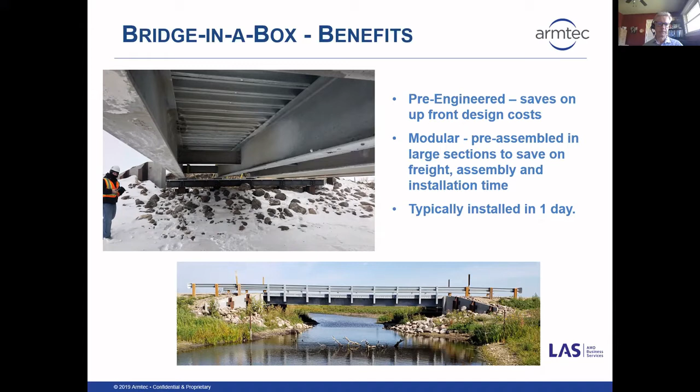The bridge-in-a-box is suitable for remote sites, resource roads, and rural roads with low traffic loads. The Canadian Highway Bridge Design Code defines these low volume roads, and Bridge-in-a-Box is designed specifically to meet this particular market. The Armtec Bridge is available with a single or double lane with widths to 8.4 meters and lengths up to 24.5 meters - that's an 80-foot long bridge. They're designed to the Canadian Highway Bridge Design Code as CL625 truckload.

That's the normal truck you see rolling down the highway. And also to what's called L100. L100 is sort of an idealistically made up truck that they use to calculate the weight, but it's similar to logging trucks or heavy permitted vehicles that may be required on the roads. So these bridges are designed to handle that kind of traffic.

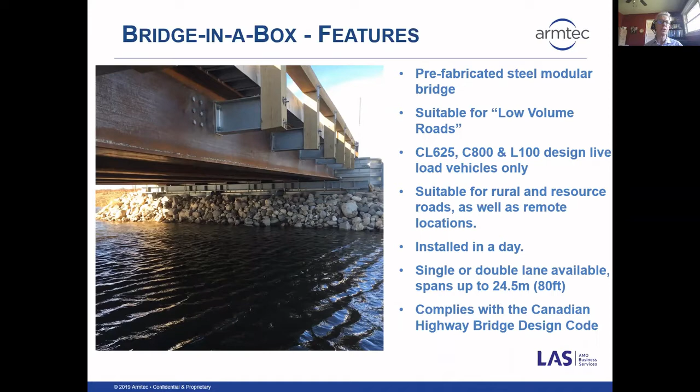Low volume roads are defined mainly by the traffic count. The bridges on low volume roads are all classified under CHBDC as Class C and Class D, which have restrictions placed on the bridge as well. The maximum traffic is defined as either 400 cars per day at 50 kilometers per hour or 100 cars driving at 80 kilometers per hour. That's the definition of a low volume road.

The bridges themselves on these roads cannot exceed 8.5 meters, and the deck can't be higher than 5 meters above the ground or the water. The idea of the low volume road bridge is this: little traffic at low speeds and a low deck have a low probability of occupant crashes, and if there is a crash, the vehicle will not fall far or into deep water.

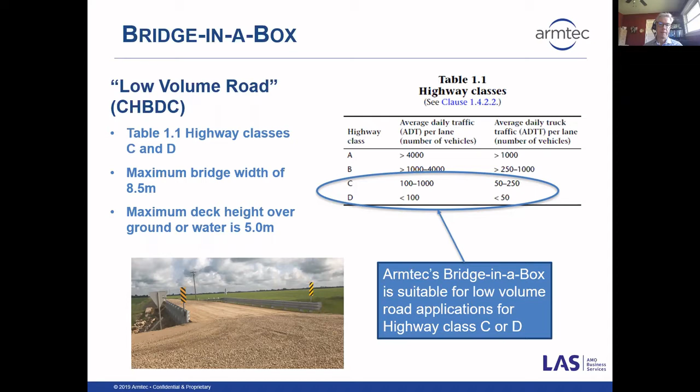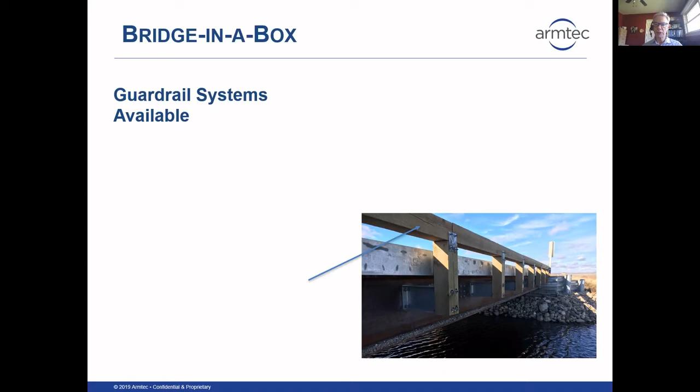With the restraints defined, it's easier to understand the design features of the modular component structure. Guardrails are most often Thrie-beam or the standard W guardrail. The connections are not crash tested and the posts may break or bend with some give, the intention being to slow the vehicle from what should already be a slow speed. Low-rise timber wheel guards can also be used if the owner wants to use those.

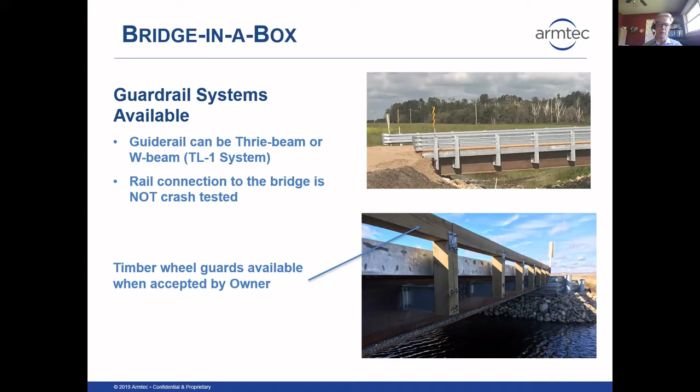The decking options: you can put either gravel, concrete, asphalt, or timber running planks. The travel surface is placed on the decking with corrugated metal planks, which span the main girders. The corrugations provide stiffness and strength, and the valleys are always filled with select material before the travel surface is brought to the final grade. The deck plank is generally galvanized, but the remaining components can be painted, galvanized, or supplied in weathering steel. Typically, the pricing hierarchy is paint, weathering steel, and galvanized, in terms of low cost to higher cost.

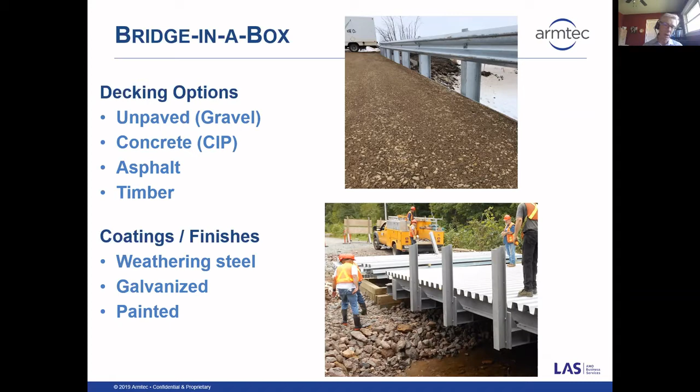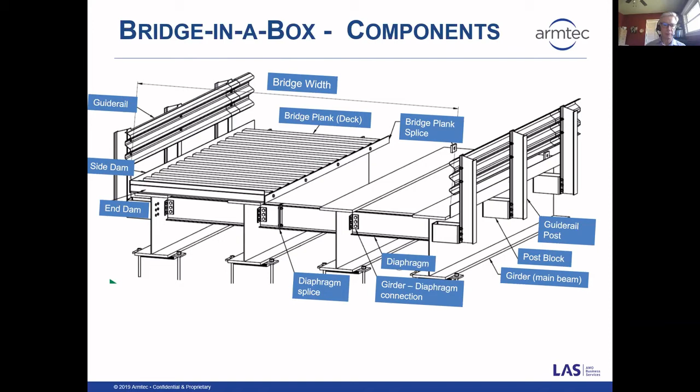Depending on the bridge size, modules may be shipped with or without the deck pre-assembled to the girders. Either way, the modules are loaded at the plant in a last-on-site, first-off loading procedure, so the offloading matches the installation sequence. The first piece that goes onto the bridge is the first one that comes off the truck, and you can literally place it if need be.

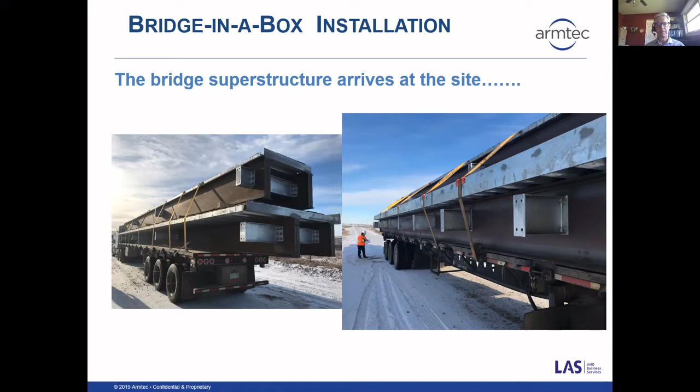The bridge plank deck arrives assembled with the end dams in place. Factory welded lugs are shown here, included so you can safely lift and place the modules. The weight of the modules has already been sent to the assembler, so he's knowledgeable about how much they weigh and can make the most cost-effective selection of crane size to use.

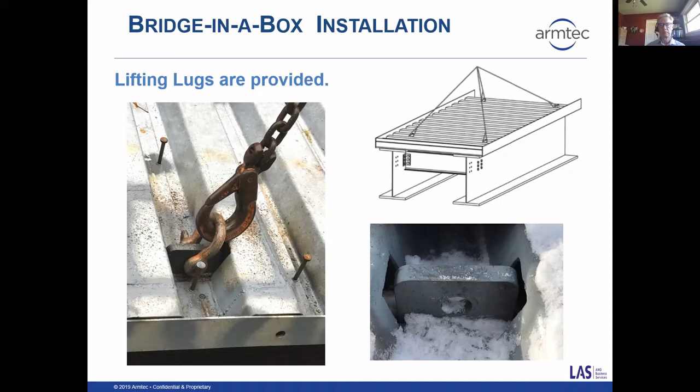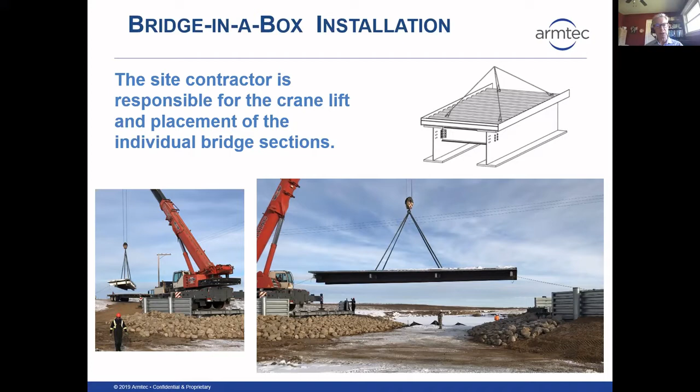Here it's easy to see how a fully prepared contractor can assemble the complete deck in one day on prepared abutments. In this job, the full girder and deck was factory supplied in two pieces. The trucks arrived, and it's lifted off the truck and set directly onto the abutments.

For multi-panel decks, plank sections are set into place and spliced together through pre-drilled factory welded side plates. On the left you can see the connection holes, and the picture on the right illustrates the deck corrugation. The wood on the deck is dunnage used to support the deck pieces during delivery, and a lifting lug is visible as well. That shows the depth of the corrugation on the deck itself. That corrugation depth is filled in first, and then the final driving layer is placed on top.

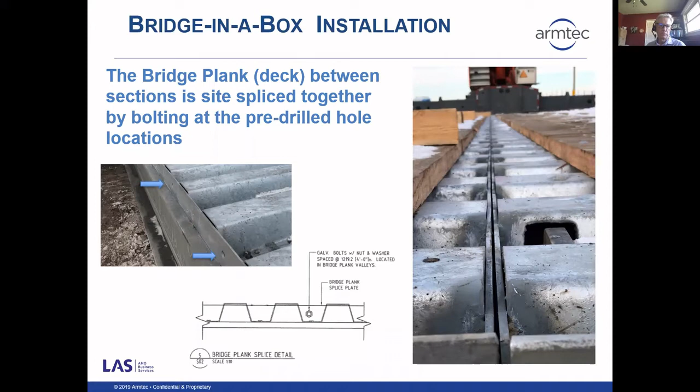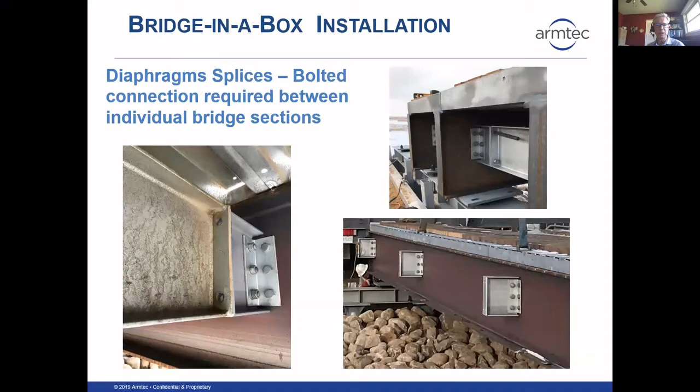The bridge sections are joined by bolted connections referred to as diaphragm splices, shown on the left. In the upper right and bottom right pictures, the guardrail blocks are factory attached to the outside girders, ready for the posts. All of that material is on the deck when it arrives at the site, so it's basically bolting the pieces together. The post block, post, and rail are all factory drilled for easy bolting in the field. The contractor simply bolts the posts to the steel block.

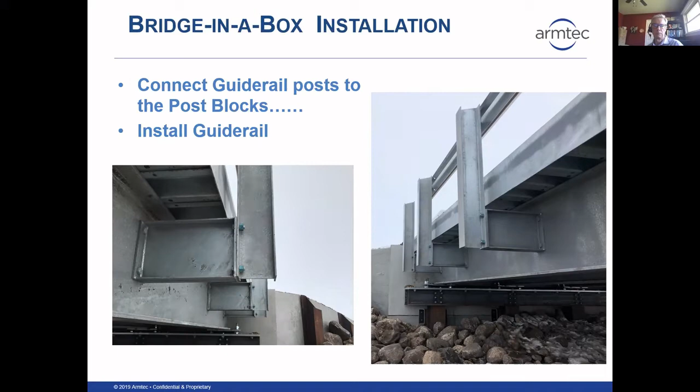The bridge assembly is completed with the placement of the selected deck surface. The final surface may be gravel, concrete, or asphalt. For a gravel running surface, the deck plank corrugations are first filled with free-draining gravel, followed by a non-woven geotextile, and lastly a well-compacted select gravel surface is put in place.

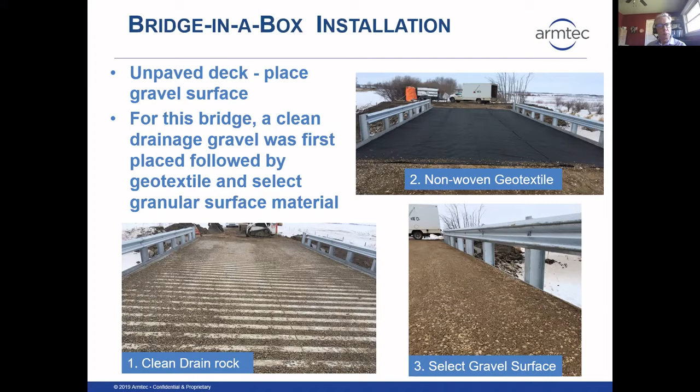Abutments and foundations are usually done through the owner's consultant working in collaboration with Armtec in order to match the bridge site's conditions. Common foundation supports include steel piles, spread footings, mechanically stabilized earth, or bin type retaining walls.

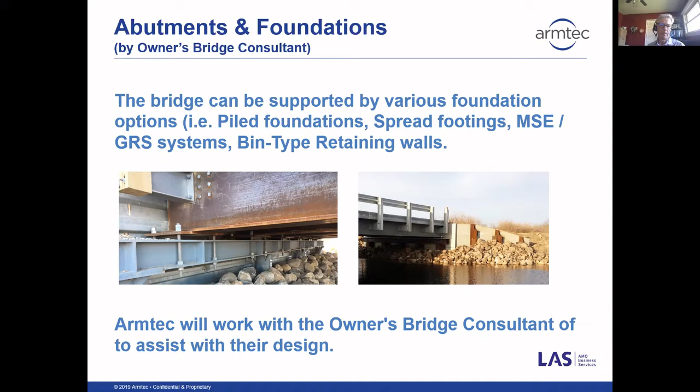Pipe piling systems, including pile caps and back walls, designed by the consultant and installed by the contractor, are very common. Armtec supplies pre-drilled bearing plates and flexible elastomeric seating pads to marry the deck and the abutment, shown here. On the left you can see the pipe piles and the pile cap, typically designed by the owner's consultant so they're sitting ready. We're usually in conversations with the consultant to make sure everything fits together at the right time, and our part begins where the pad and bearing plate are connected to the top of the piles.

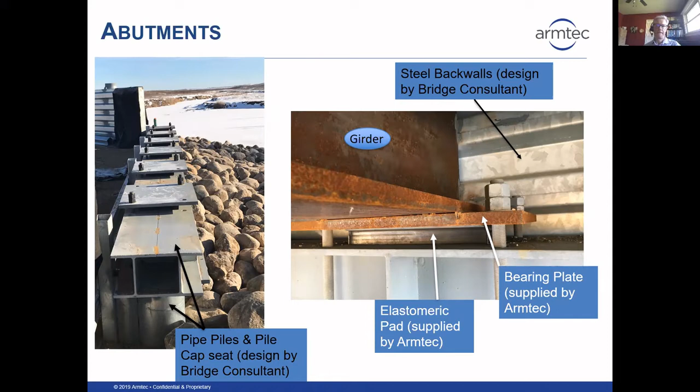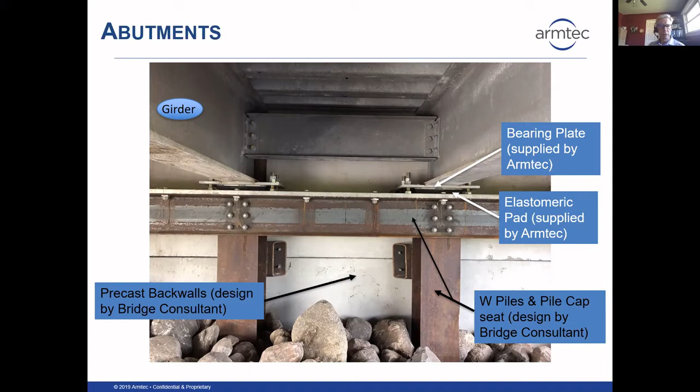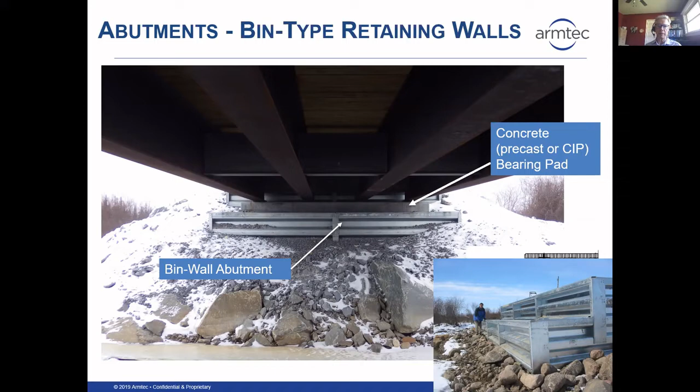Bin wall abutments are excellent choices for remote sites and fast abutment placement. The bins are delivered to the site as easily assembled components, which a 4 to 5 man crew can construct in 2 or 3 days with no need for heavy equipment and cranes.

So in very remote sites, these bin walls arrive in components. They're put together without needing big cranes. You can do them with small equipment, so they're fairly easy to assemble.

In many cases, Armtec assists with the bin wall design. All that's required by Armtec is some very general information, such as the bridge span, the live load, the roadway width, and the bridge dead load. We can then put the abutments using bin walls together as part of the package.

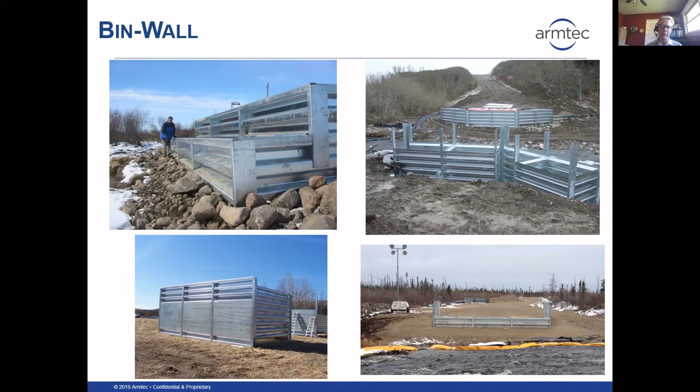Bin walls are manufactured in 16-inch high increments. You can see in the top picture the sections, all 16 inches in height, and they may reach as high as 10 to 12 meters. They're excellent alternatives for bridges higher than 5 meters, standard girder bridges, and also for other prefabricated structures.

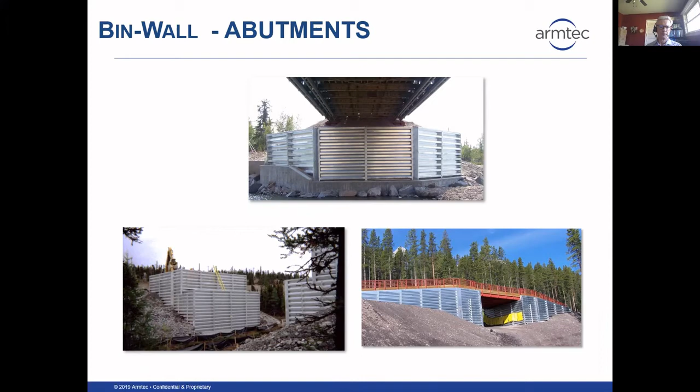With the foundation and abutment work complete, the bridge is lowered into place, and once it's centered and aligned at its correct elevation, the girders are then welded to the bearing plate. This is really the only part that welding is involved with on the site.

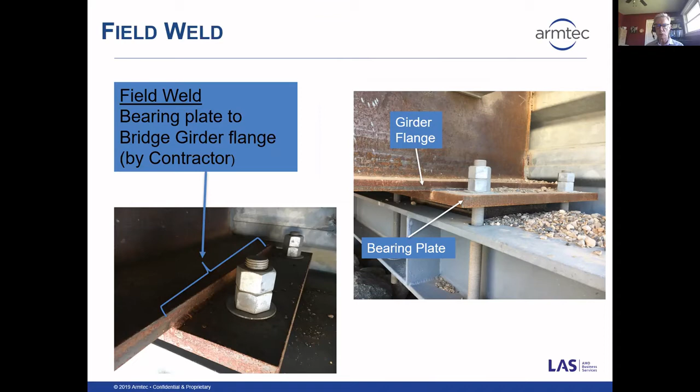Everything else is bolted together. So once everything's set correctly, the girder is welded to the bearing plate. At the front there, you can see the bolts that go through the bearing plate and down into the flanges to hold the bridge to the foundation.

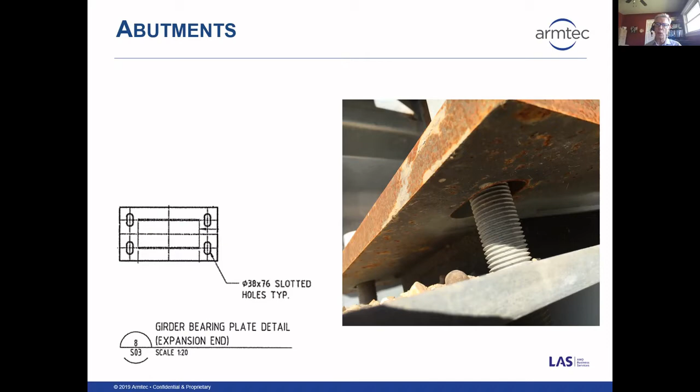At the other end of the bridge, the connection is the same, but this time there's a special slotted hole put into the bearing plate. The slotted hole basically allows for expansion and contraction of the rigid steel deck, so it's able to move slightly one way or the other as it expands or contracts according to the weather. The other end is pinned, as shown before, and the slotted hole allows it to move around a bit.

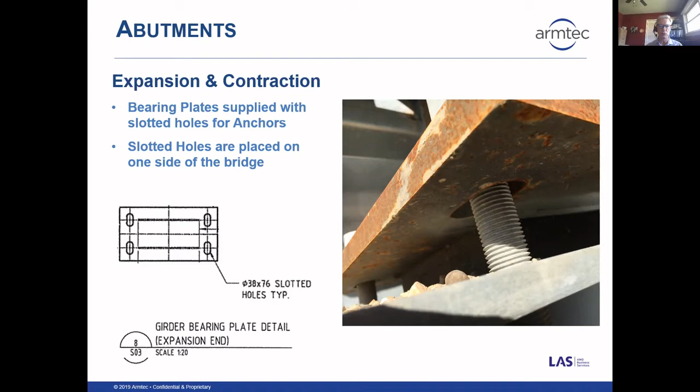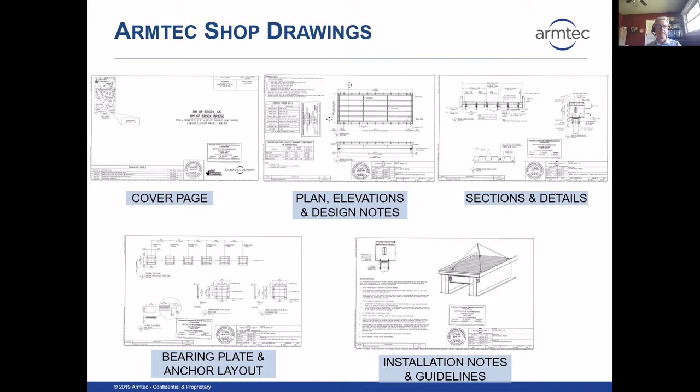To ensure a good on-site fit, the bridge is fully shop assembled, bolted, fitted, checked, and matched in the shop. Not until all the modules fit correctly is it disassembled and placed on trucks for shipment to the site. We basically ensure that it goes together in the factory so it'll go together on site, because there's nothing worse than somebody getting there and it doesn't fit. That in itself is extremely cost effective.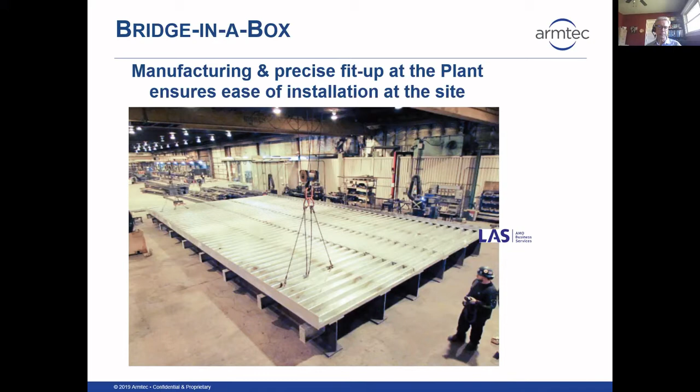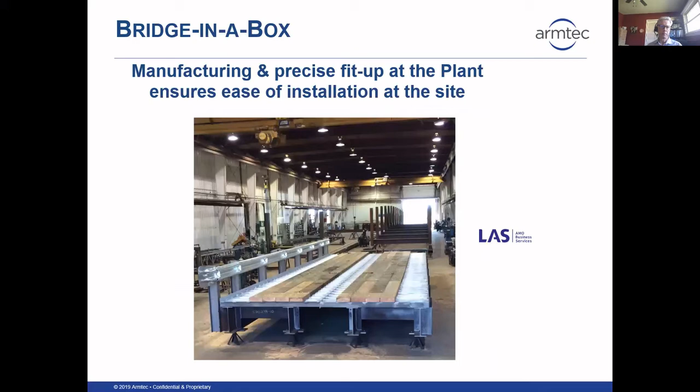In summary, the Bridge-in-a-Box is a pre-designed, prefabricated composite steel bridge designed for low volume roads. They're rated to CHBDC truck loadings for fast and easy assembly, and easy to install for remote sites. They're great for low traffic roads, rural and forestry roads, and available in single and double lane structures up to 80 feet in length.

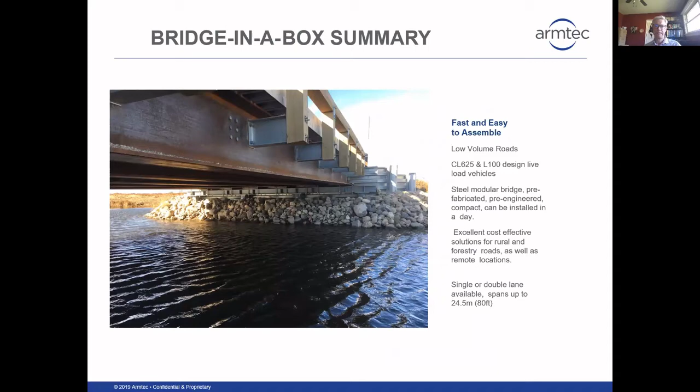Just to finish up, we'll do a tour of some of our projects. Here at Kisbey, Saskatchewan, southwest of Regina, timber wheel guards have been used on a gravel deck. The structure is 8.5 meters wide and 15.24 meters long, a 50-foot long structure.

It's being lowered. That 60-foot length is the maximum we can do in one girder. If they get up into 80-foot girders, which is the longest, you end up having to splice two girders together. So 60-foot max, and anything longer than that would require two girders.

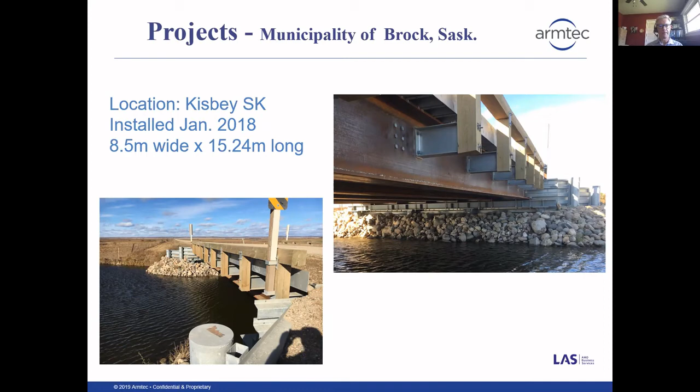This is a 60-foot long structure with 2 lanes. Armtec bin walls and wing walls have been used on this structure. This is also in Saskatchewan.

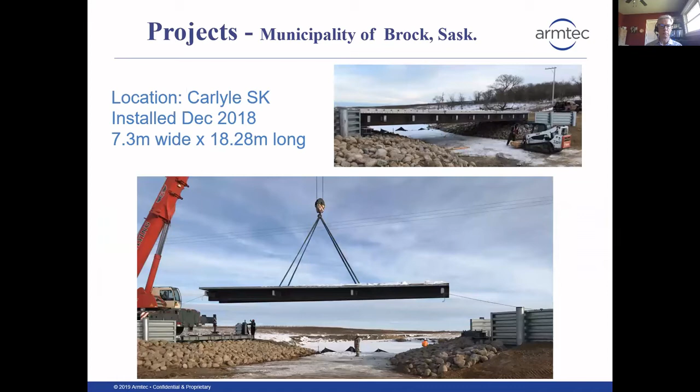Installed in southwest Manitoba near the North Dakota border, this 7.3 meter wide by 15.2 meter long bridge replaced an old timber pile single lane wooden deck structure. It had a low traffic count, so they used a single W-beam guardrail and selected the gravel surface.

You can see here, there's variations that you can use depending on what your bridge consultant might feel comfortable with. This one uses precast concrete wing walls that are held in place by pile-driven W-beams.

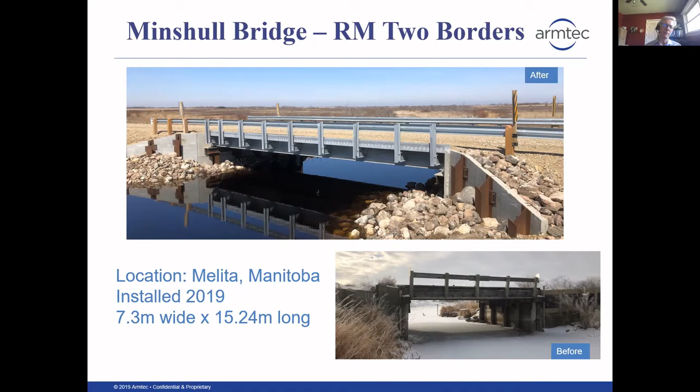In Maple Ridge, British Columbia, this is a dual lane, 11-foot wide lane structure that was used to replace an existing structure.

Interesting, this one left the concrete abutments in place from the original bridge, and they reset the new bridge on top of that. In the bottom right, you can see they're placing half of the deck onto the existing concrete abutments that are there.

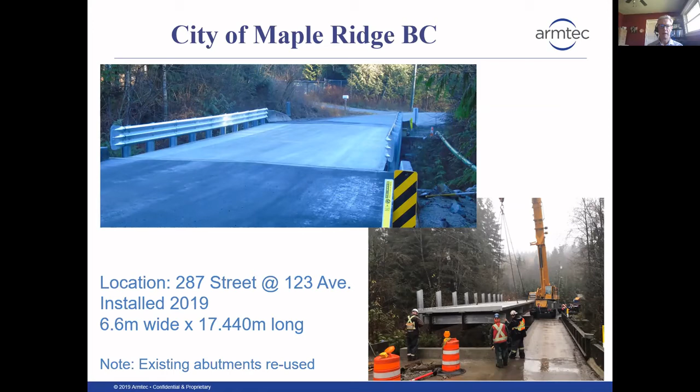These are a couple of structures just to kind of show what it is. And with that, I'd be more than happy to take any questions that you may have. Thank you very much.

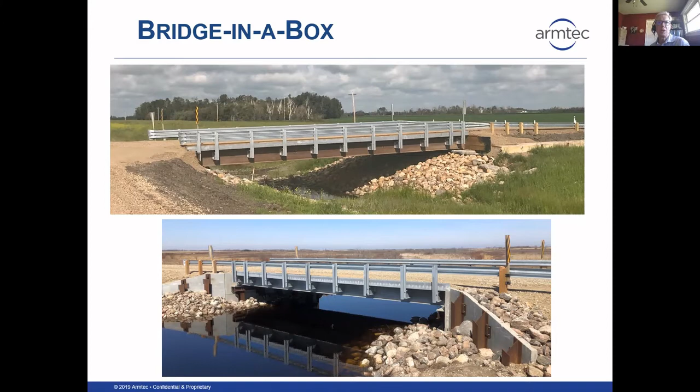That's a good question. The guardrails probably will be bent, may break the posts off, but it won't damage the bridge. The bridge will be fine. So it would basically end up as a guardrail replacement. Yeah, that would be it. And that's not a big job, as you could see. It would take just to unbolt the post itself if that's all that's damaged, or even perhaps the connection point. But it wouldn't hurt the decking or the bridge itself, no.

Okay, so next one is: what's the life rating of these types of bridges compared to a conventional bridge? How long will they last? Okay, again, a very good question.

The code itself actually requires the bridges to have a 75-year life expectancy, okay? There are actually, as I mentioned, 3 possible coatings: the paint, the galvanizing, and the weathering steel. Weathering steel, of course, has a special alloy that in and of itself is meant to rust a bit and protect itself.

Galvanizing itself is also standard 75-year life. The thought behind this is that in most of these roads, because the traffic is so low, they rarely have a bunch of salt on them. So in that particular situation, the Ontario government basically says, okay, these have a 75-year life because of the coating itself, the galvanizing and the weathering steel. So they have to be designed to have a 75-year life, and we put the galvanizing and weathering steel together to be able to do that.